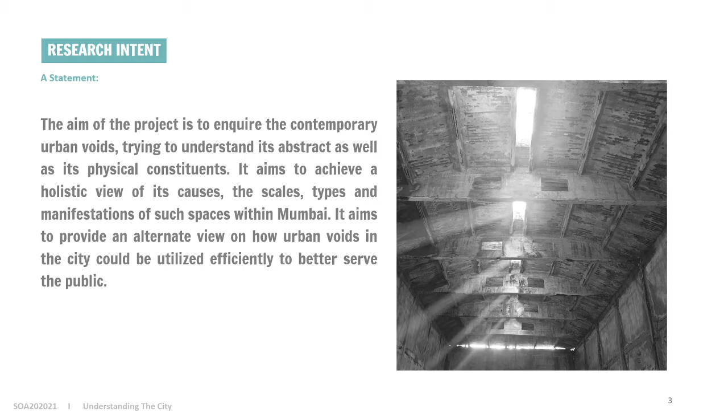Research intent: the aim of the project is to inquire into the contemporary urban void, trying to understand its abstract as well as its physical constituents. It aims to achieve a holistic view of its causes, scales, types, and manifestations of such spaces within Mumbai. It aims to provide an alternate view on how urban voids in the city could be utilized efficiently to better serve the public.

The structure and framework of the old urban areas have memory attached to it. It is only the physical presence of this structure that conveys the history of the growth of the city and imparts the spirit of the city. To completely wipe them off the fabric of the city would be like blanking off completely an important era of history.

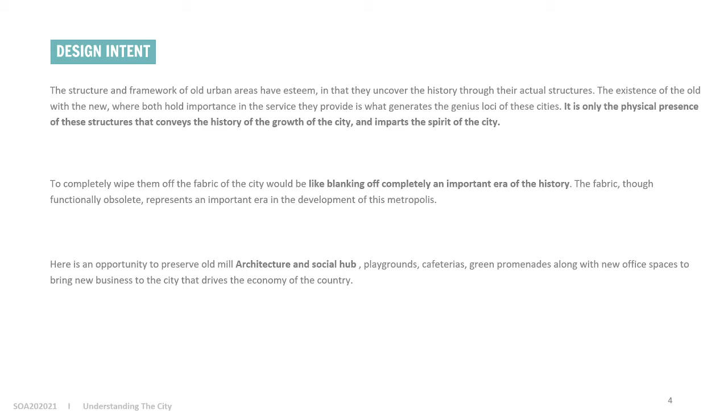So there is an opportunity to preserve an old mill architecture into a social hub, playground, cafeterias, and green promenades, along with new office spaces to bring new business to the city that drives the economy of the country.

Mumbai is a city that never sleeps. Its history dates back to the 17th century, where it was given as a dowry to King Charles. Its detailed evolution and timeline will be studied in the further slides.

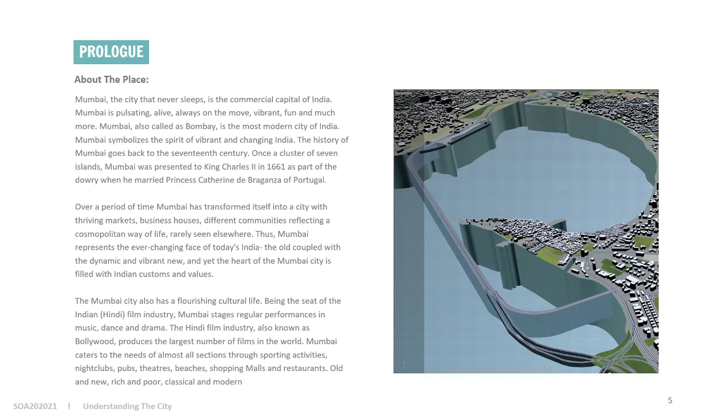The precinct is Byculla. The land area of the precinct is 7.5 square kilometers. Population of the precinct is 4,40,000, and distance from the city center is 2.3 kilometers. FSI of the site selected is 1.0.

There is no proposal on the site yet. The governing authority for the selected site is MBPT. Elected site area is 22,000 square meters and 5.62 acres.

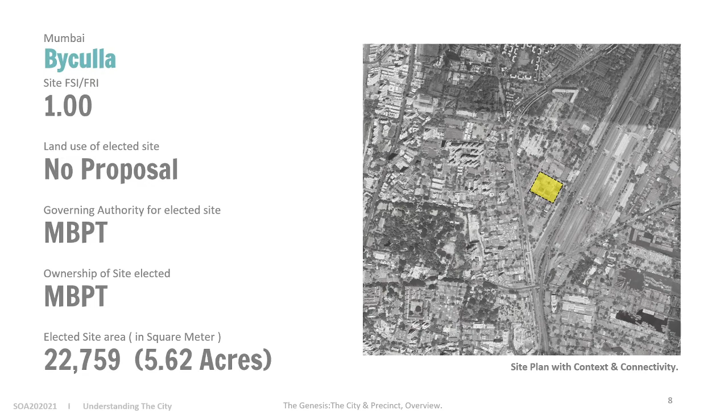The station is named Cotton Green after an Art Deco building of Cotton Exchange and a series of warehouses. The older Cotton Green in Colaba was thus named because it was in a village green and housed the original Cotton Exchange. Evolution of Mumbai.

The term Mumbai was derived from Mumbadevi temple. Then in 1661 it was given as a dowry to British King Charles. Then 7 islands merged into one big mass. First railway line was built between Mumbai and Thane. University of Mumbai was established. Mumbai Port Trust was formed. BMC was founded.

Gateway of India was constructed in order to welcome King George and Queen Mary. King Edward Memorial Hospital was inaugurated. IIT Bombay was established in Powai. The last tram made its journey from Bori Bunder to Dadar.

The Great Bombay textile strike started. The first phase of the three-part terminal was opened. Worli Sea Link was opened on 30 June. Mumbai Metro from Versova to Ghatkopar and the monorail was launched in 2016.

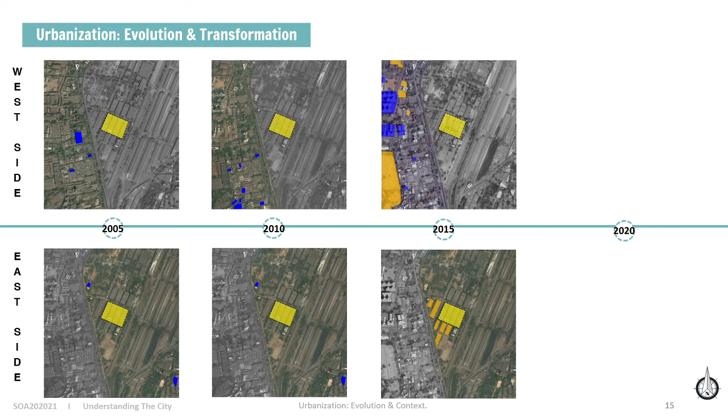So I have compared my precinct with Bangalore, Delhi, and Chennai, because there was a similar kind of feature. In my precinct there is a railway station that divides the eastern side and the western side. Similarly, this kind of feature can be observed in these cities.

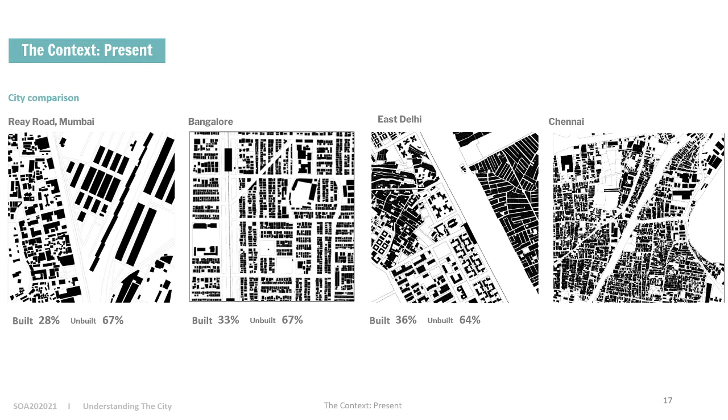The precinct street network shows a contrasting pattern on the eastern side and the western side. An inorganic pattern is observed, and a parallel pattern is observed on the western side.

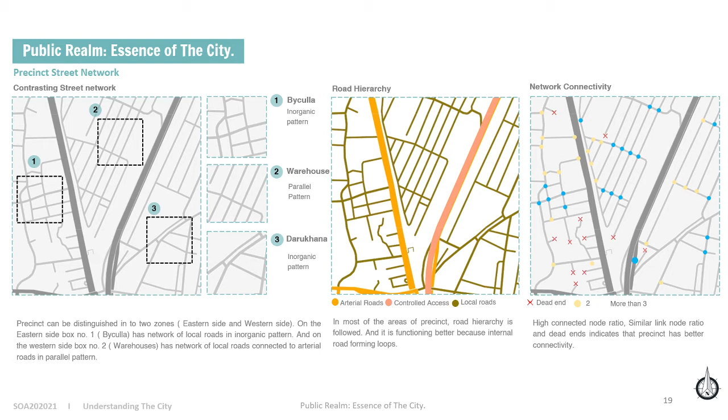The road hierarchy: arterial roads and local roads are well connected with arterial roads, and arterial roads are well connected with the main road. It is functioning better because internal roads form loops, with high connected node ratio and similar link node ratio, indicating that the precinct has better connectivity.

Local roads, like Dr. Mascarenhas Road, are 12 meters in width, with residential buildings and chawls observed on both sides. Commercial and parking activities are let out on the edges of the road, and local roads have parallel parking on both sides.

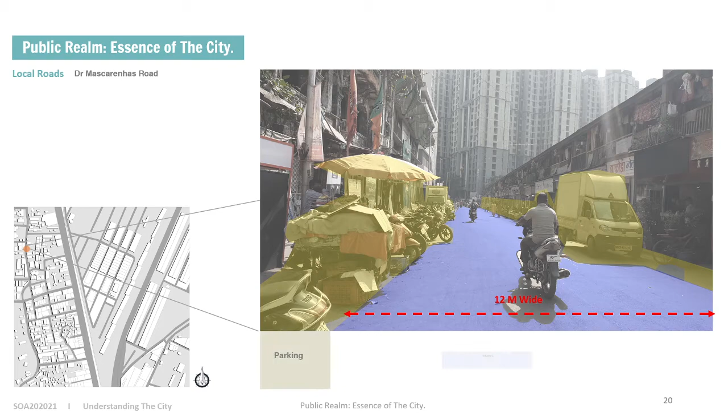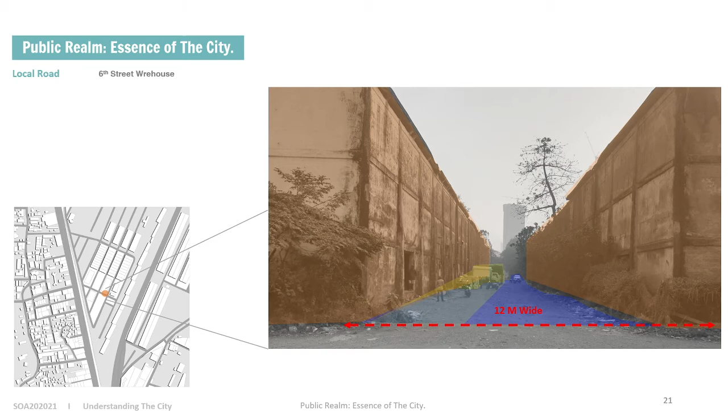The local roads on the eastern side, in the warehouse area, are also 12 meters in width, and truck parking activities are let out on the edges of the road. Loading and unloading activities are observed, and warehouse buildings are seen on both sides of the road.

The main road is 20 meters in width. Railway station and steel workshops are observed on both sides of the road, and there is no commercial activity happening on this road.

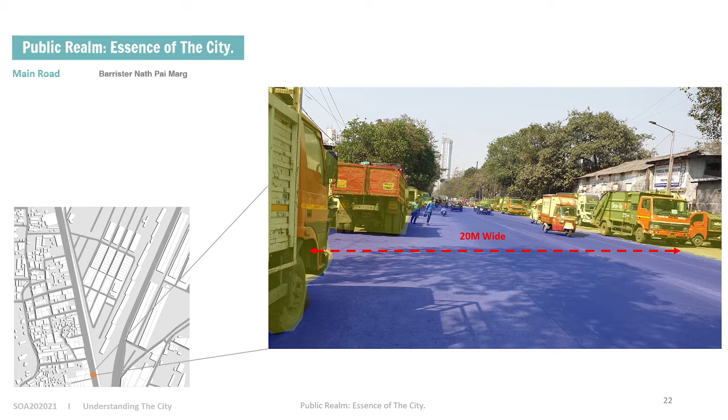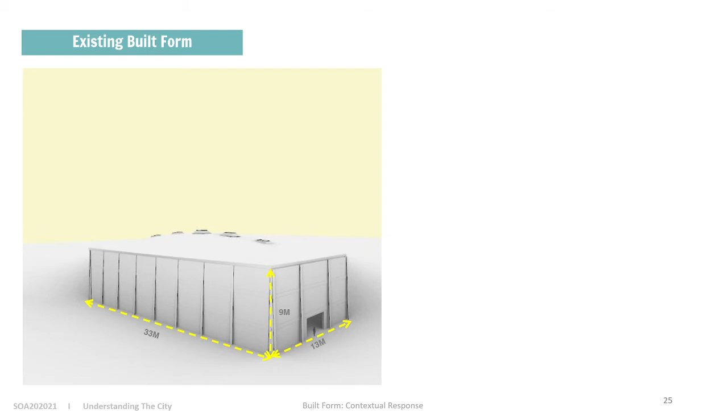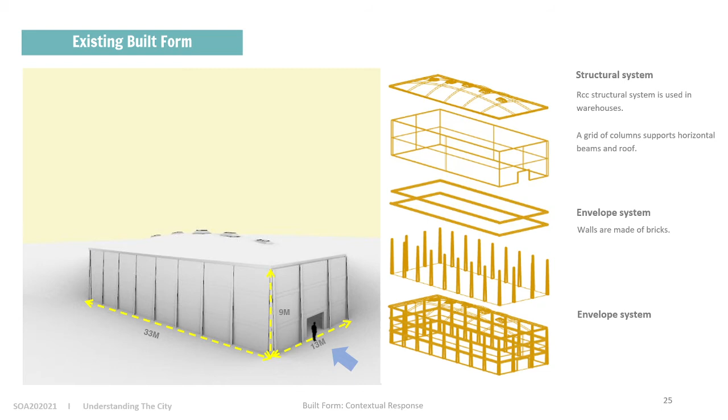The warehouse is 33 meters in length, 13 meters wide, and 9 meters in height. The structural system is RCC, and the grid of columns supports horizontal beams and roofs. Envelope walls are made of bricks. This is the side elevation of the warehouse, which has a tie beam, RCC roof, skylights, and RCC columns.

This is the vehicular movement or traffic in the site from morning to evening. In the morning there is heavy traffic due to loading, unloading, and movement of trucks and buses. At night there is smooth traffic. This is the traffic pattern from morning to evening.

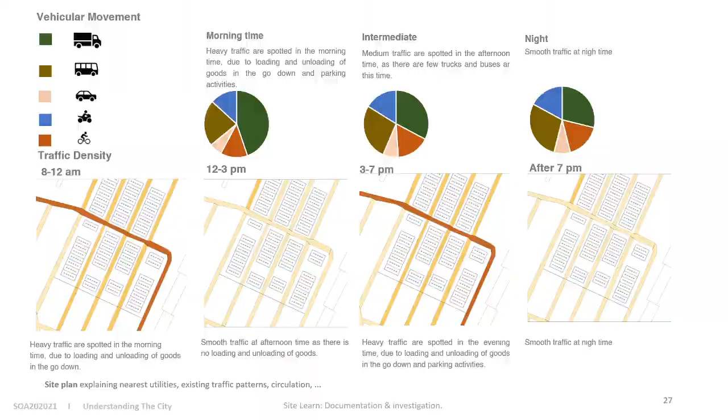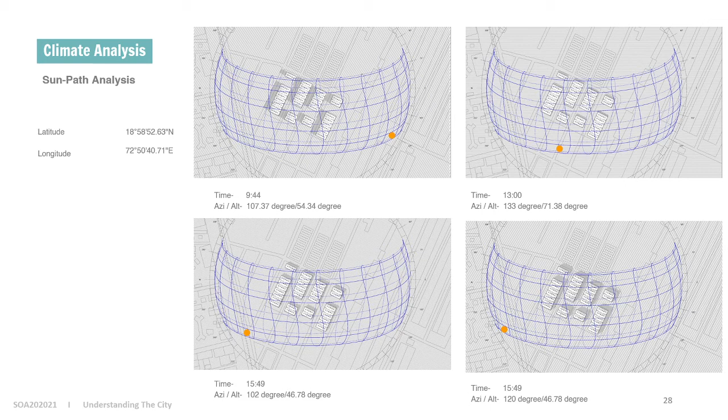Climate analysis: the latitude of the site is 18 degrees and the longitude is 72 degrees, and this research will be used for orientation and design development. A few areas of the site are self-shaded because of the existing warehouse. These are the site sections.

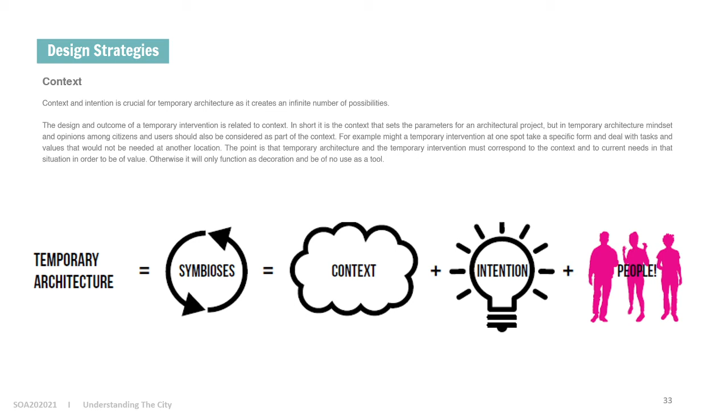Context is also an important strategy, because context and intention are crucial for temporary architecture as it creates an infinite number of possibilities.

These are a few principles of adaptive reuse: preservation, subtraction, addition, and extension. Preservation does not only mean preserving an existing structure or build form, it also means preservation of silhouette. Addition can mean addition of structural members or an interconnecting bridge, or subtraction.

In this particular strategy, a few existing warehouses which are in dilapidated condition will be removed and demolished.

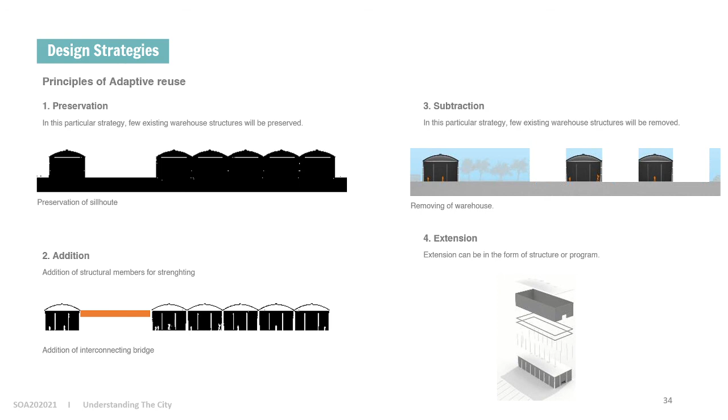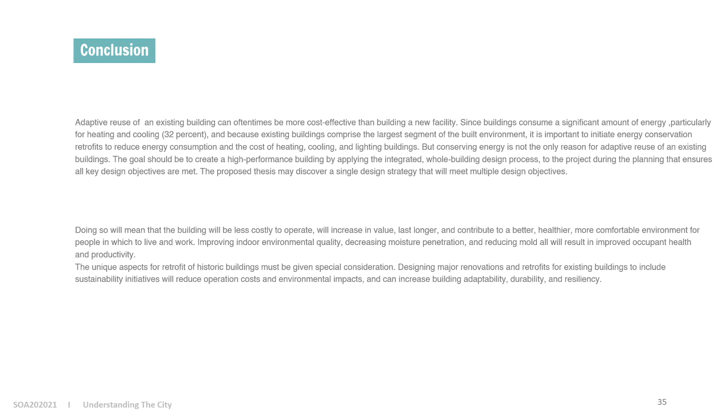So, in conclusion, adaptive reuse of an existing building can oftentimes be more cost effective than building a new facility. But conserving energy is not the only reason for adaptive reuse of an existing building. The goal should be to create a high performance building by applying the integrated whole building design process during the planning, ensuring all key design objectives are met. Thank you so much.